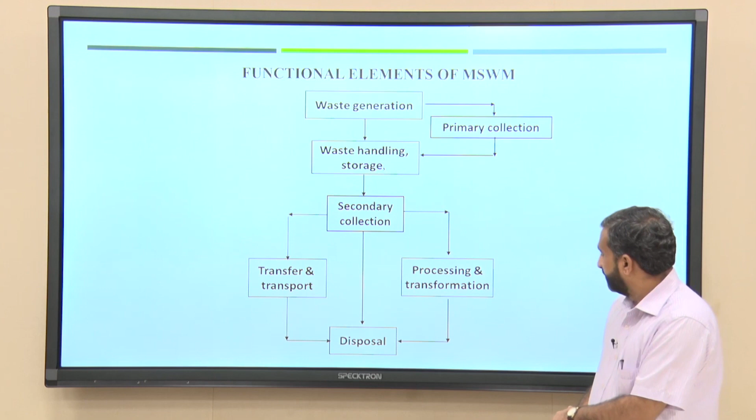Hello students, we are on module 8, chemical transformation. In the previous two lectures I talked about the major environmental issues from the incineration or combustion process. One was flue gas treatment, and the second is the solid residue produced after the incineration process.

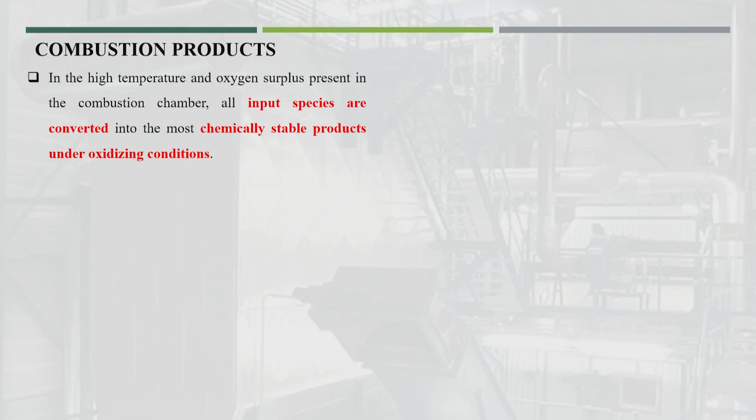Today we are going to talk about flue gas characteristics followed by treatment. First we will go for combustion products, what are the combustion products getting produced during the incineration process. At very high temperature, with huge amounts of oxygen or air for complete burnout of the dry waste, the entire material converts into chemically stable products under oxidation conditions, in the presence of air or oxygen.

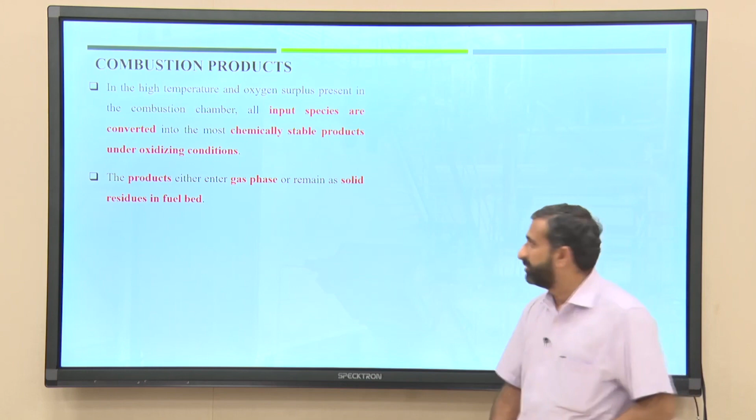These products either enter the gas phase, the maximum going into the gas phase, almost 80%, and the remaining will remain as solid residue in the fuel bed. So this is what I was talking about, two major issues: one, when the entire material converts into the gas phase, the other is the solid phase or solid residue.

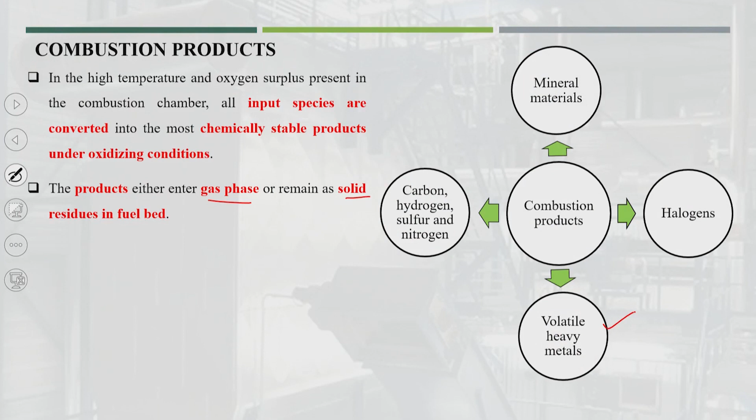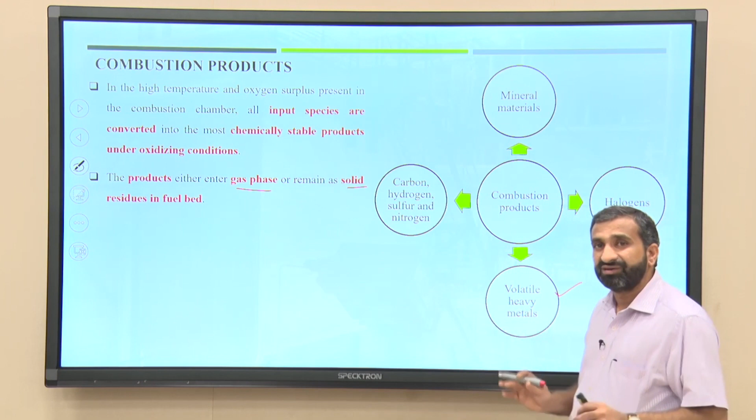There are different kinds of products coming out from the incineration or combustion process. The first is mineral material, another is carbon, hydrogen, sulfur, nitrogen, halogens, and volatile heavy metals. This is very important because normally metals won't get volatilized in the air, but since the incineration process temperature goes up to 1100 degree centigrade, some of the metals also get volatile and come into the flue gas.

Now, first is the mineral material. What could be the mineral material? There could be metals like iron, manganese, nickel and their compounds, and this mostly comes up in the bottom ash, that solid residue, or slag, at the end of the grate, as you saw in the previous lecture's line diagram. Trace products of incomplete combustion are also found in the bottom ash. So these mineral materials are normally found in the solid phase, and that is normally called bottom ash or slag.

Now the second one: carbon, hydrogen, sulfur and nitrogen. The stable oxidation product of carbon compounds converts into CO2 in the gas phase, hydrogen converts to H2O, also in the gas phase, sulfur is converted into SO2 and solid sulphate. Both products will be gaseous and also come up in solid form as solid sulphate. Nitrogen partially converts into NO, which is one of the most polluted gases.

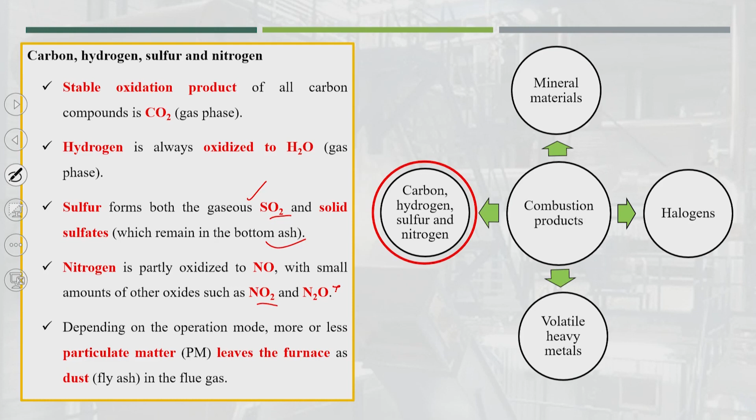This NO is oxidized into NO2 and N2O, which is also a very problematic gas. Depending on the operation mode, more or less particulate matter, PM, also leaves the furnace, and that is normally called fly ash, which also becomes part of the solid residue.

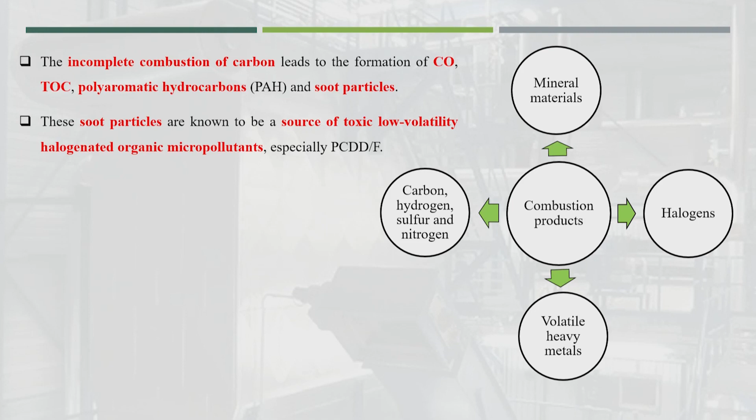Uncompleted combustion of carbon leads to the formation of CO, TOC and PAH, which are other problematic particles, and soot particles also get produced. These soot particles are known to be a source of toxic, low volatile, halogenated organic micropollutants, especially PCDD and PCDF, which we will discuss in detail, normally called dioxins and furans.

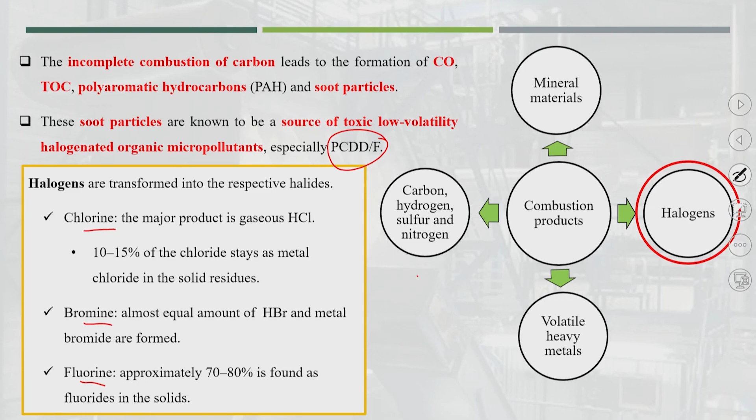Finally, the volatile heavy metals. Many metals evaporate as chlorides in the furnace, and more than 80% of the mercury and cadmium content in the waste leaves the combustion chamber in the flue gas. 30 to 50% of zinc, arsenic and lead is also evaporated in the combustion chamber and transferred to the raw gas, also coming into the flue gas.

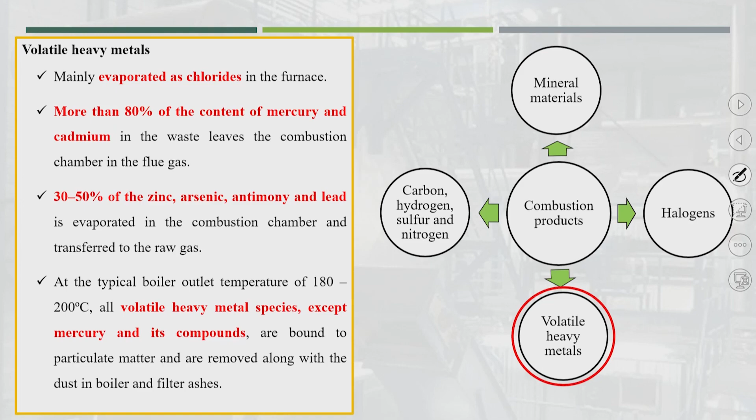Especially at the boiler outlet temperature of 180 to 200 degree centigrade, the volatile heavy metal species, except mercury and its compounds, are bound to particulate matter and are removed along with the dust in boiler and filter ashes. So these volatile metals also get produced, mostly coming into the flue gas, and need to be treated.

Now, the flue gas. This lecture we will mostly talk on flue gas characteristics, followed by their treatment. About 80% of waste is transferred into the flue gas during the waste incineration process, as I told.

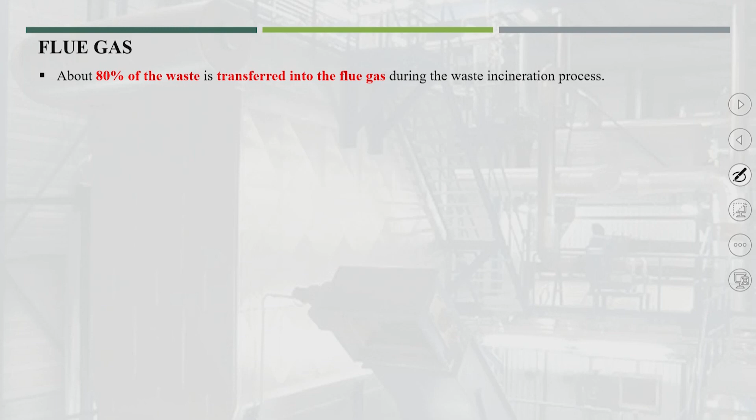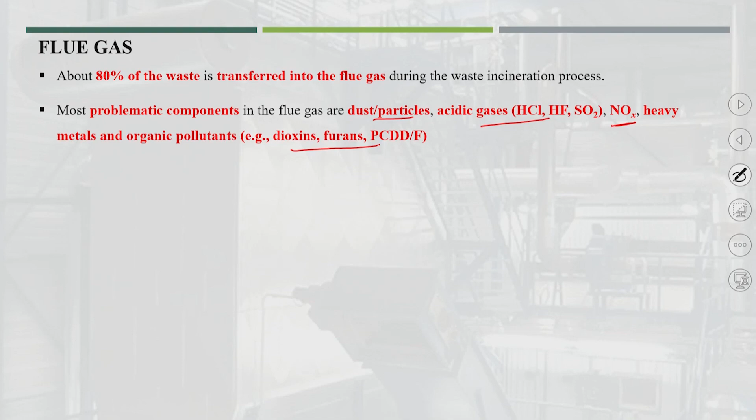And the problematic compounds in the flue gas, these are the major compounds in the flue gas. First is dust or particles, acidic gases like HCl, HF, SO2, NOx, nitrogen compounds, heavy metals, and organic compounds like dioxins and furans, which we call PCDD and F.

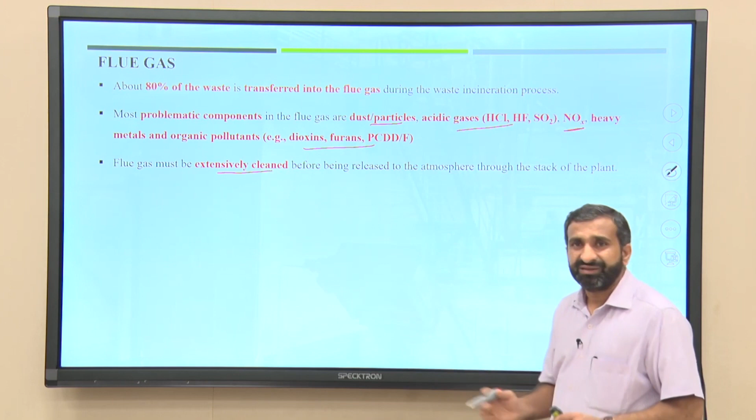So flue gas must be extensively cleaned before being released to the atmosphere through the stack of the plant. Sometimes it is also found in the literature that the cost of treatment of flue gas is more compared to the furnace or combustion process. So here you can understand that we need a very extensive cleaning facility for flue gas.

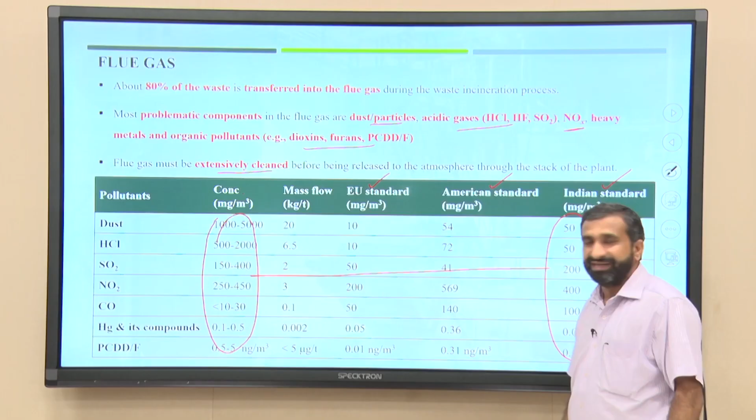But initially only the European Union came up with the standardization, followed by America, they came up with the standards of the flue gas. Now India also has come up with proper standards of treatment.

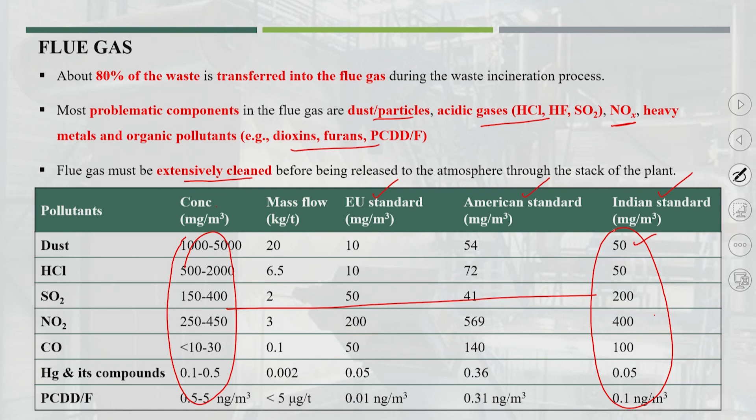Now we will talk about the flue gas cleaning system. Normally once flue gas is produced from the furnace, that will go to the flue gas cleaning system. This cleaning system is required to reduce the concentration of specific pollutants to well below the respective air emission limits, which we saw in the previous slide.

And there are 4 major pollutants. First, which we are going to talk about in this lecture, is dust or particles, acid gas - that is HCl or HF gases coming out in the flue gas, dioxins and furans, and finally nitrogen compounds.

But before that, in this line diagram, one very important unit of this entire flue gas cleaning system is the ID fan. We will first discuss this in one slide, then we will go pollutant by pollutant for treatment. These ID fans are called induced draught fans.

See, the draught fan - in the previous slide it was put at the last position. Now see, whatever gas is produced from the furnace, how that gas will go to the treatment system, or how we can maintain the velocity required through the cleaning system, and again that gas has to go to the stack - this management is entirely done by the ID fans.

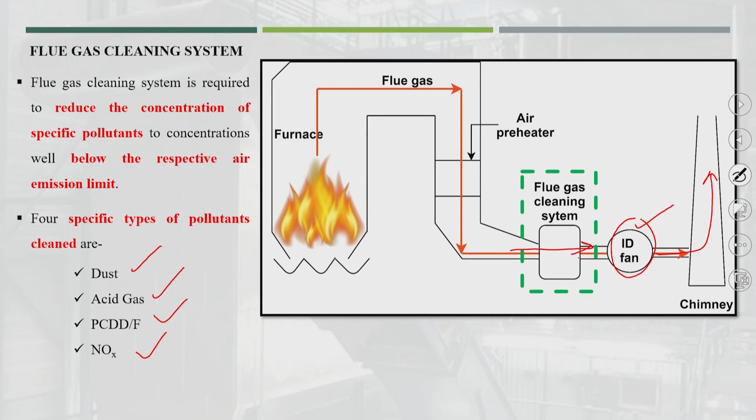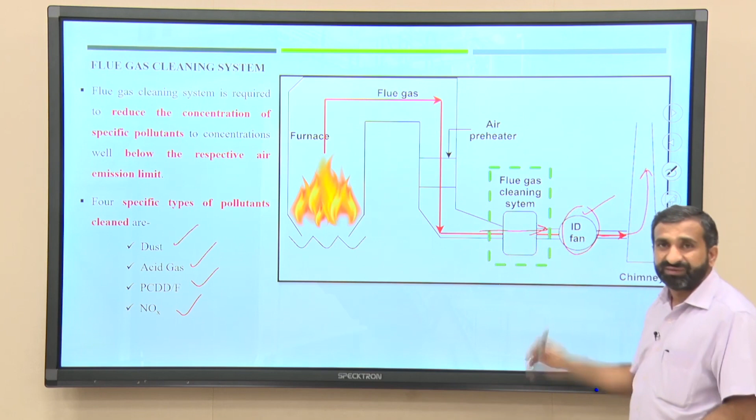So the ID fan is at the end of this treatment system, so that whatever flue gas is produced from the furnace will go through the flue gas treatment systems or facilities. This is the key component in the flue gas treatment system.

You see here, this is one of the diagrams of the ID fan. This ensures the transport of the flue gas from the furnace through all the process steps of the flue gas treatment plant to the stack. This is specially what ensures the transport of flue gases.

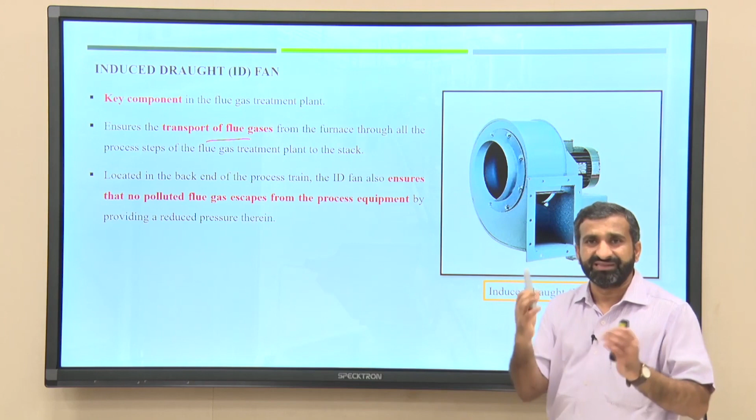Located at the back end of the process train, the ID fan also ensures that no polluted flue gas escapes from the process equipment. This is one very important point. It is possible because the temperature of this flue gas in the initial phase goes to 700 to 800 degree centigrade, and it is possible that it will escape from that particular line. So this ID fan is located at the end of the entire process, so that this flue gas should not escape from the process equipment.

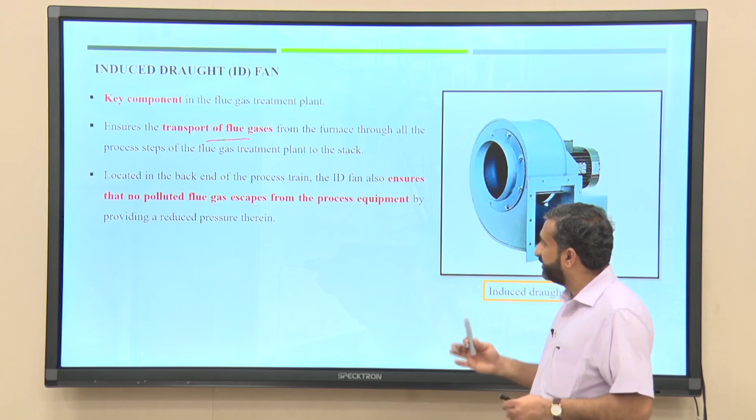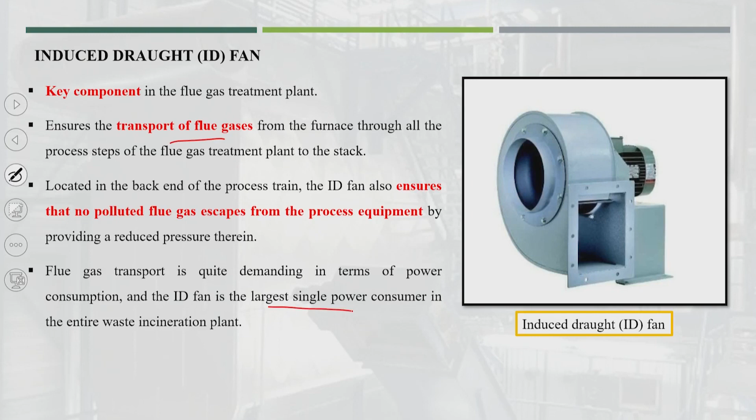Flue gas transport is quite demanding in terms of power consumption, and the ID fan is the largest single power consumer in the entire waste incineration plant. This is what I was talking about - the cost of treatment itself is sometimes very high compared to the installation of the entire incineration plant. Why? Because the cost of these fans is also sometimes very high, with high power consumption. So power consumption means the maintenance cost is also very high for the incineration plant.

Now, one by one we'll go through the pollutants. The first pollutant is the dust. So how is dust removed? There are different kinds of treatment facilities available for dust removal.

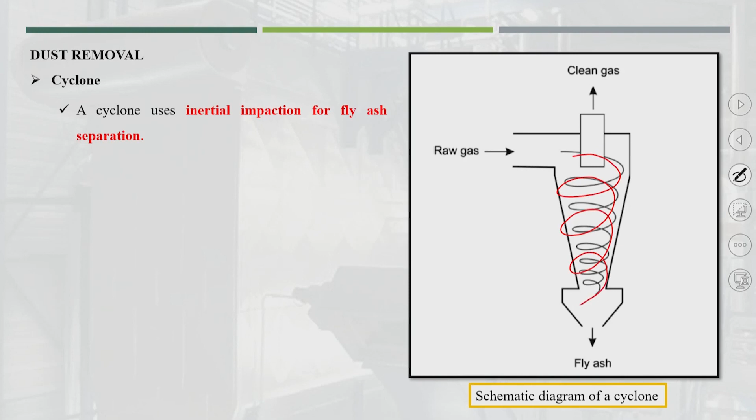The first is the cyclone. The cyclone uses inertial impaction for fly ash separation, like you see here - this is a line diagram of the cyclone. The flue gas passes through this vertical unit. The gas enters the cylindrical chamber tangentially at high velocity, forcing it into a cylindrical path. Very high velocity enters the cylinder, and the centrifugal force acting on the particles causes them to collide with the wall, where they impinge and settle down into a discharge hopper. Whatever particle gets impinged onto the wall is finally deposited into the discharge hopper.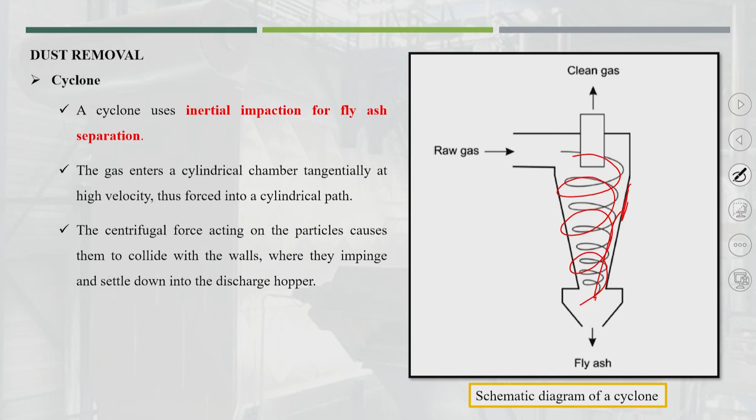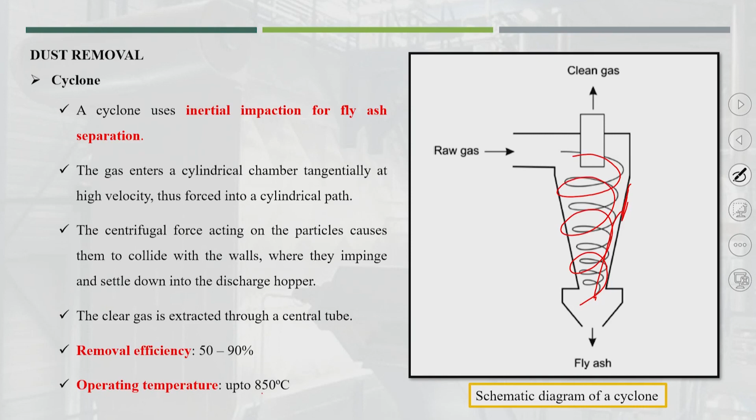The clear gas is extracted through a central tube. Removal efficiency is 50 to 90%, and this treatment unit can operate at temperatures up to 850 degree centigrade - that's one of the major benefits of this system. Whatever gas is produced from the furnace, the temperature can go up to 800 degree centigrade, so that gas can go directly to the cyclone.

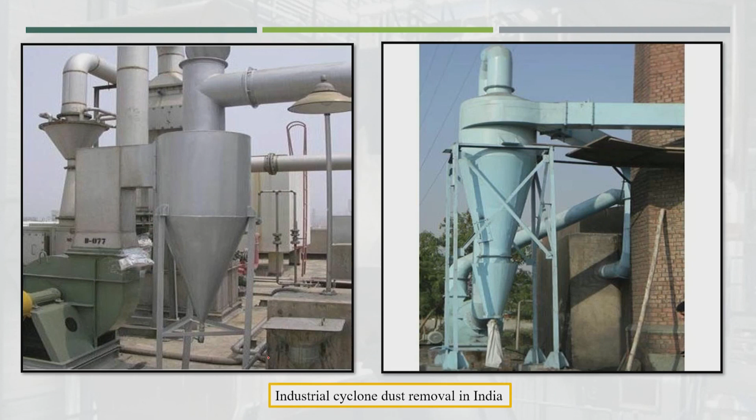This is an industrial cyclone, you see here, similarly designed. This is an industrial cyclone dust removal unit in India.

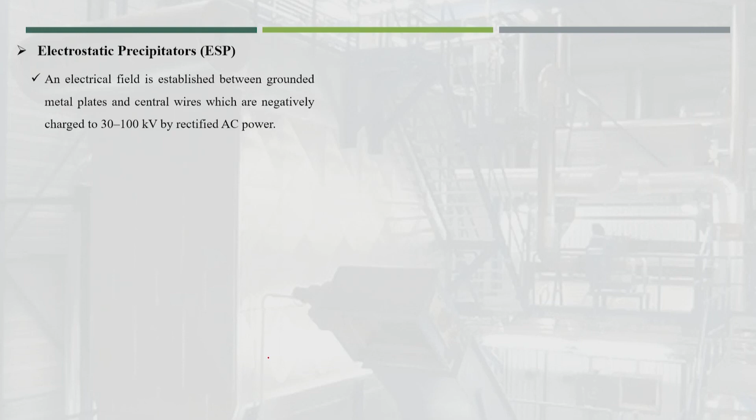Now, the next unit is the electrostatic precipitator. This is one of the oldest treatment units for removal of dust or particles. Small, fine particles can also be easily removed by the electrostatic precipitator. In the ESP, the electrical field is established between grounded metal plates and a central wire, which is negatively charged by rectified AC power. There will be two metal plates, and inside there will be wires - high voltage wires for corona discharge.

That wire will have negative charge, and the flue gas passes through the aisles between the plates at low velocity, 0.5 to 1.5 meters per second. This is the raw gas flowing between the two plates and the central wire. The fly ash particles are ionized by the corona discharge and start to migrate along the lines of the electrical field until they impinge upon the plate.

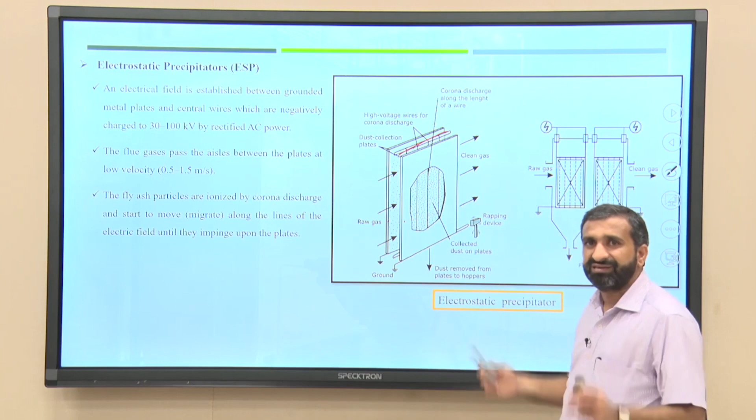Mostly these particles are positively charged, and the corona wires have negative charges, so the particles directly impinge onto the plate. Finally, the plates get cleaned and the particles or solids are collected into the discharge chamber. At certain times, the deposited particles are removed from the plate by rapping or mechanical vibration and collected into the discharge hopper.

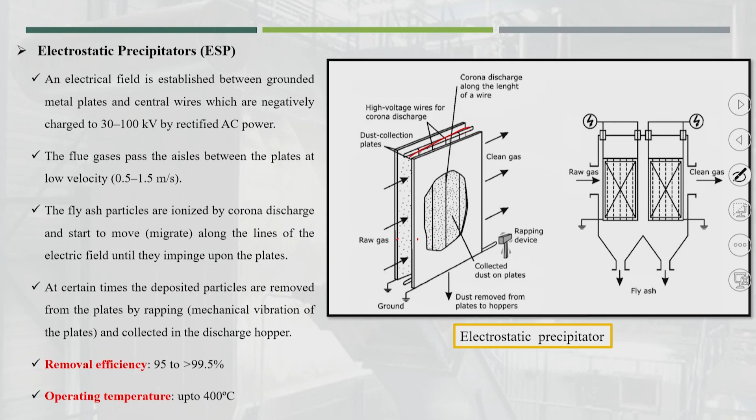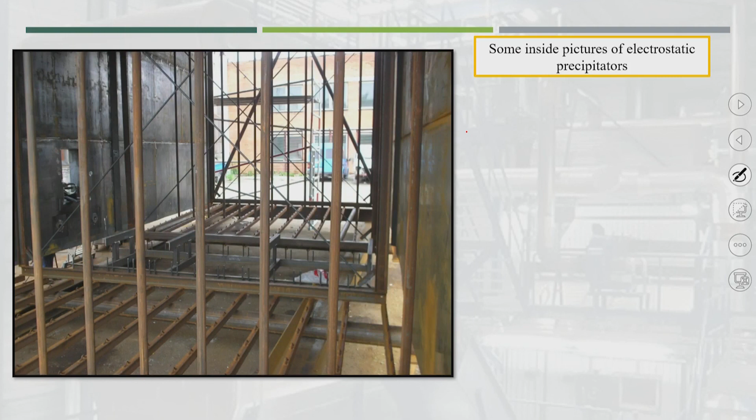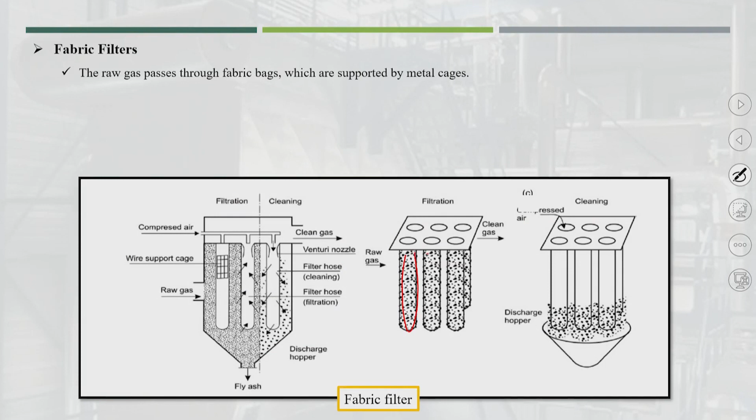Now, the fabric filter is another treatment technology available to remove particles or dust. The raw gas passes through fabric bags, which are supported by a metal cage - these are the fabric bags. Gas flows commonly from the outside to the inside, and finally the clean gas comes out.

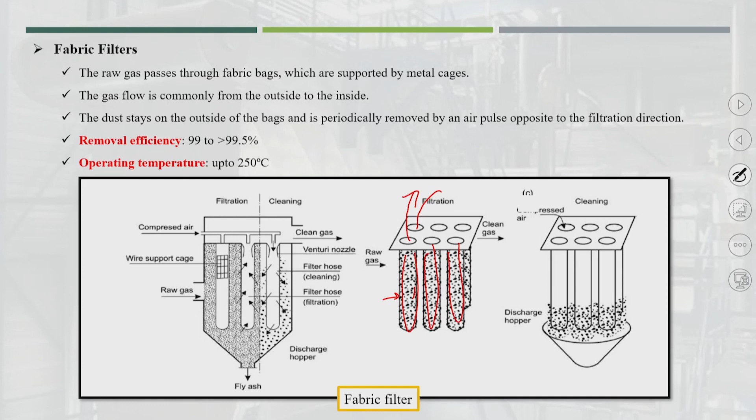The dust stays on the outside of the bag and is periodically removed by air pulses opposite to the filtration direction - so from time to time the settled solids get removed. Removal efficiency is also very good, about 99 to 99.5%. The problem is that the operating temperature should not exceed 250 degree centigrade, because these are cloth or fabric bags, so we can't put higher temperature gas into them.

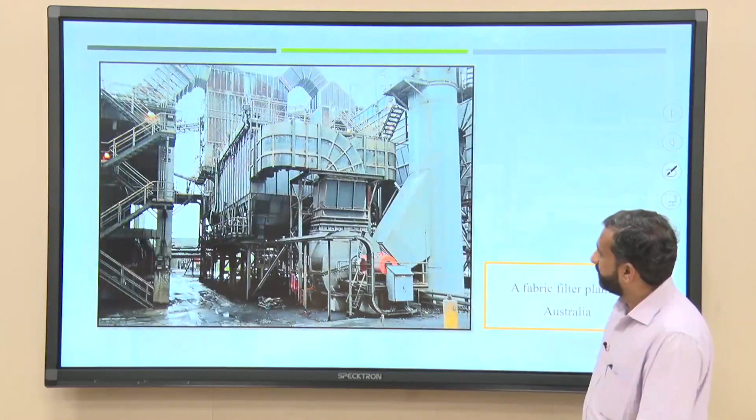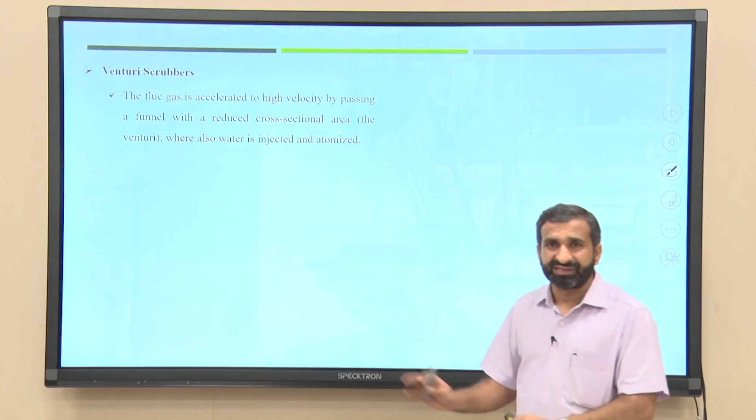This is a fabric bag plant in Australia. Now the last unit is the Venturi scrubber. This is well-known technology, normally available at incineration plants, especially for medical waste incineration. This technology is available in India too - wherever medical waste incineration plants exist, you can see this technology very easily.

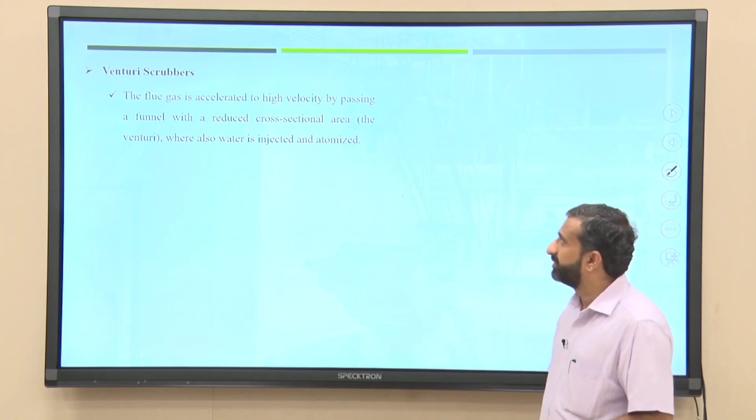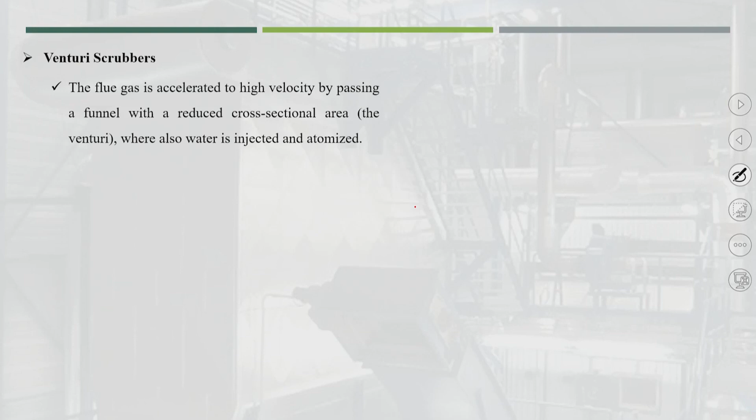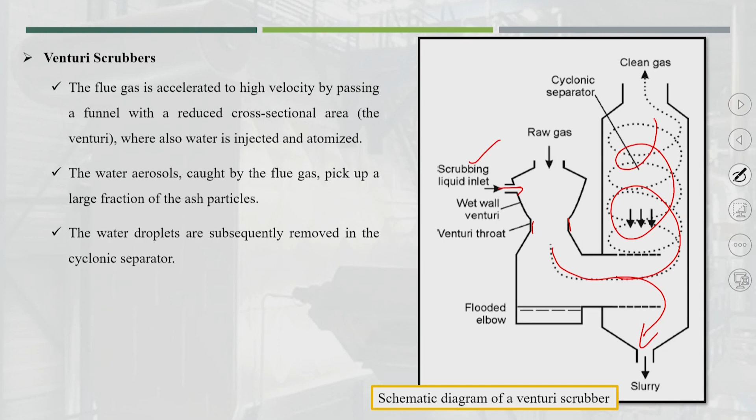Raw gas is entering, and here the scrubbing liquid water is getting deposited onto the raw gases. Because of that, the particles mix with the water and come out in slurry form, while the remaining clean gas comes out. A venturi throat is followed by one cyclone, and from the cyclone clean gas comes out. The water aerosol caught by the flue gas picks up a large fraction of the ash particles, and the water droplets are subsequently removed in the cyclonic separator.

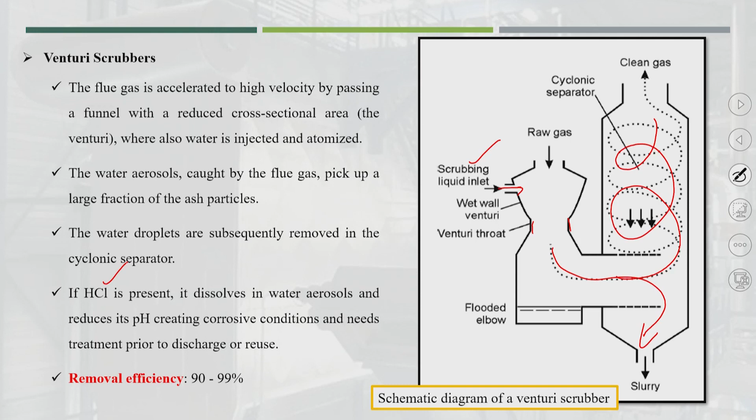If HCl or other acid gases are present, they dissolve in the water aerosols and reduce its pH, creating corrosive conditions that need treatment prior to discharge or reuse. Here removal efficiency is 90 to 99%, and we can also operate at temperatures around 400-500 degrees using this venturi scrubber.

This is one unit of the venturi scrubber.

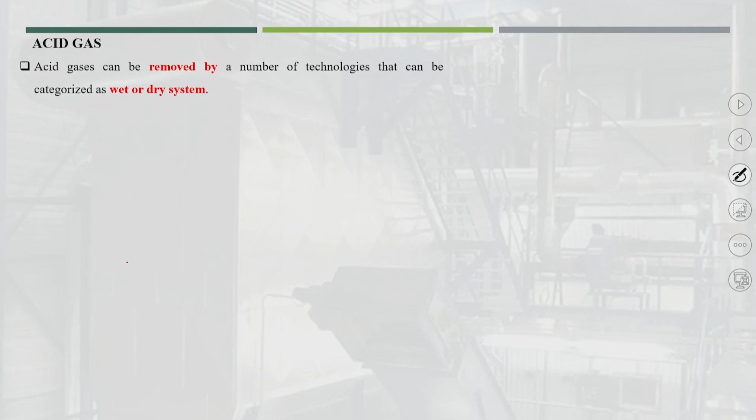Now, the next pollutant is acid gas. Acid gas can be removed by a number of technologies categorized as wet or dry systems. First we will go for the wet system. Wet scrubbing is normally applied after the fly ash has been removed, typically in an ESP. So once the fly ash is removed, we can go for the wet scrubbing facility.

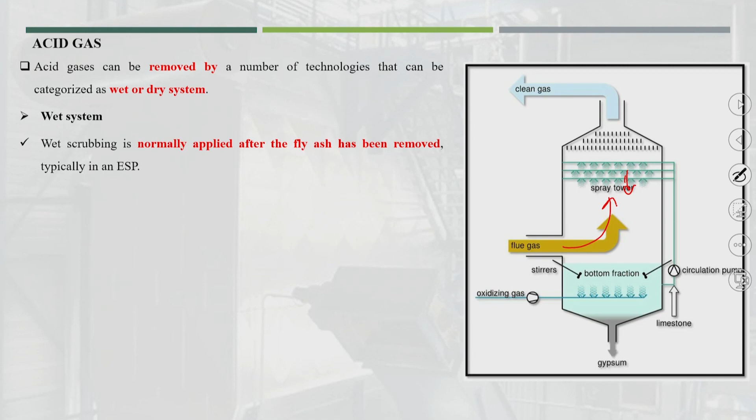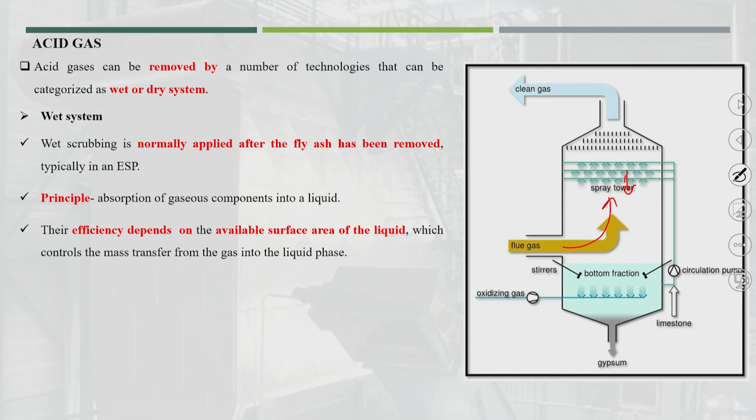Here water is getting sprayed, and the flue gas enters from below into the cylinder, and finally clean gas comes out. The principle is absorption of gaseous components into a liquid. The efficiency depends on the available surface area of the liquid, which controls the mass transfer from the gas into the liquid phase.

It has a two stage installation with an initial acidic scrubber to remove HCl and HF, followed by a slightly acidic or neutral alkaline scrubber to remove SO2. Both acid gases could be removed this way: first the acidic scrubber, followed by the alkaline scrubber.

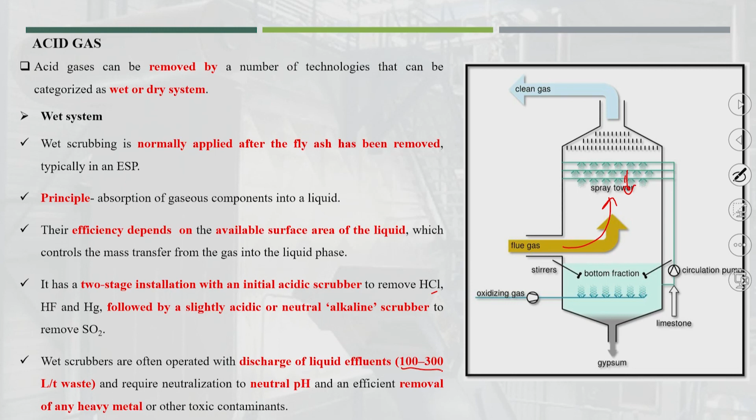But the problem is this wet scrubber is often operated with discharge of liquid effluents. A lot of slurry is produced, and this liquid effluent amounts to 100 to 300 liters per ton of waste combusted or incinerated, requiring neutralization to neutral pH and efficient removal of heavy metals or other toxic contaminants. So if you are planning a wet scrubbing treatment facility, you also require a wastewater treatment facility to treat that liquid effluent.

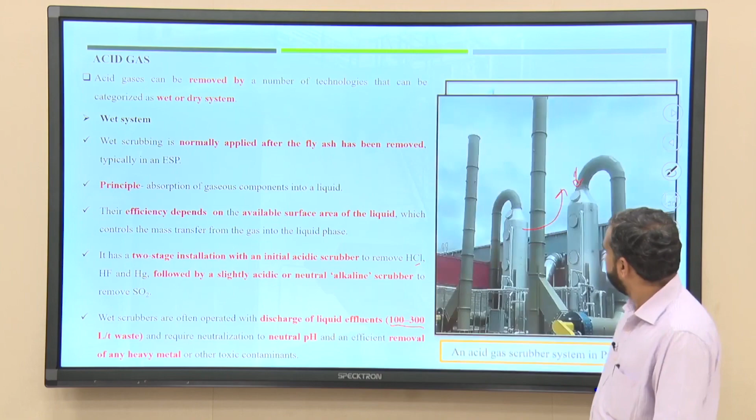This is one of the scrubbers - a packed bed wet scrubber.

Now for the dry system, normally we inject two chemical compounds like calcium hydroxide and sodium bicarbonate (NaHCO3) into the flue gas for neutralization of acidic gas compounds. In the dry process, the agent is injected as dry powder, maybe together with water, while in the semi-dry system the agent is injected as a slurry that dries in the flue gas.

So how does this dry system remove HCl? If you are adding calcium hydroxide, it will produce calcium chloride plus H2O. So finally this HCl, the acid gas in the flue gas, is treated by adding a few chemical compounds.

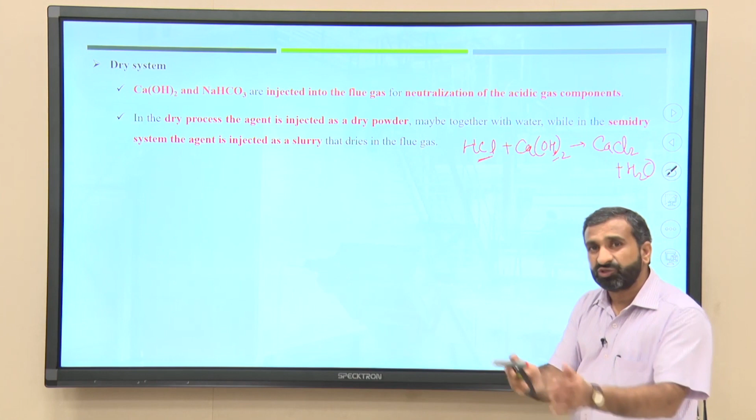So the dry system is sometimes mixed with the venturi scrubber. We saw that in the venturi scrubber, water is injected into the throat. So if you mix these chemical compounds along with the water, not only will the dust get removed, but also the acids available in the gases will get removed under the venturi scrubber system itself.

Now, dioxins and furans are normally called PCDD and F - polychlorinated dibenzo-p-dioxin and dibenzofurans. They are already present in the MSW, but they are almost totally destroyed in the combustion chamber. At temperatures reaching 800, 850, or 1000 degrees, all dioxins and furans get destroyed completely. But when the flue gas temperature is lowered, new formation of dioxins and furans becomes possible.

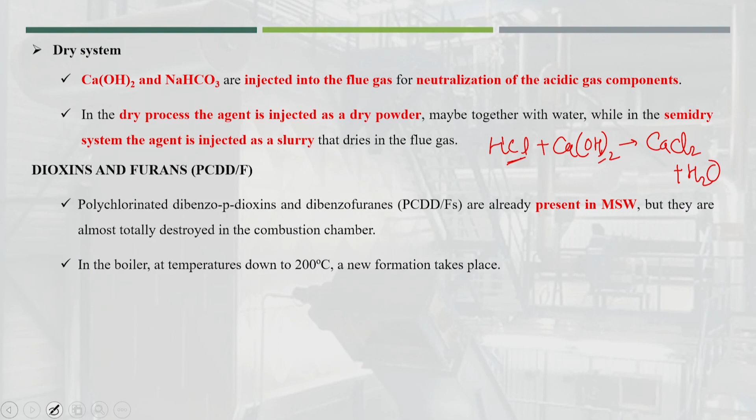So in the boiler, when the temperature goes down to around 200 degrees centigrade, new formation takes place - meaning normally below 400 degrees centigrade, these dioxins and furans get produced again in the flue gas.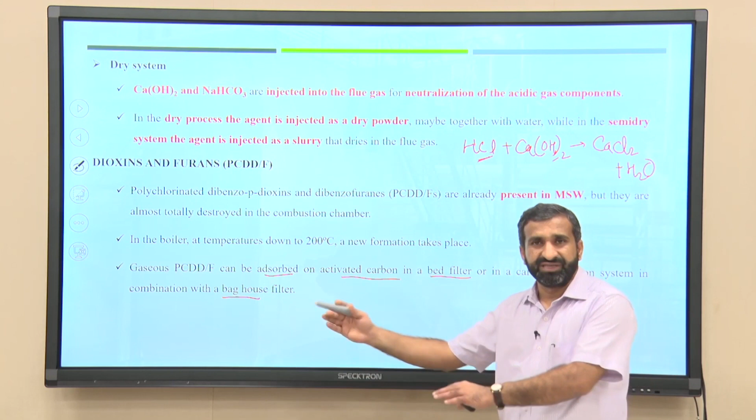The gaseous dioxins and furans can be adsorbed onto activated carbon. This is the only technology currently available for dioxin removal - activated carbon bed filter, or a carbon injection system in combination with a baghouse or fabric filter. This way the dioxins can be adsorbed onto the carbon bed filter, through a simple adsorption process followed by fabric filter treatment, removing or treating the flue gas for dioxins.

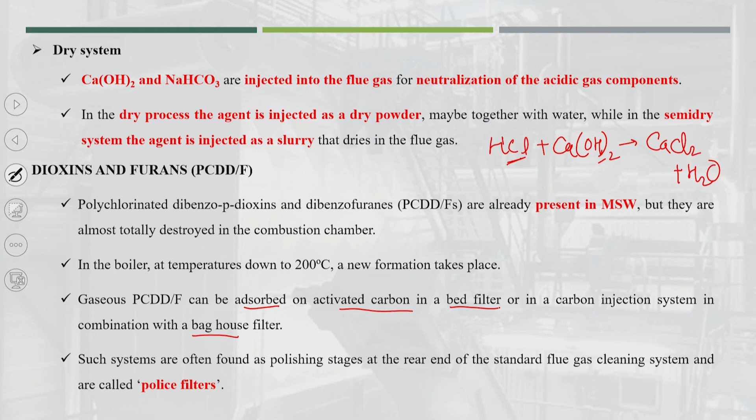Such treatment systems are often found in the polishing stage at the rear end of the standard flue gas cleaning system, and are normally called a police filter. These units are the last unit of the entire flue gas treatment system.

Now, the NOx nitrogen compounds. NOx is a common term for nitrogen oxide and nitrogen dioxide, which can be in two forms. In waste incineration, typically more than 95% of total NOx in the flue gas is present as NO, which is the problematic one.

If the combustion temperature drops below 850 degree centigrade, an increasing fraction of NOx is present as N2O, and the problem with N2O is its extremely high greenhouse gas potential. If you compare with CO2 which is 1, N2O has a greenhouse gas potential of 310.

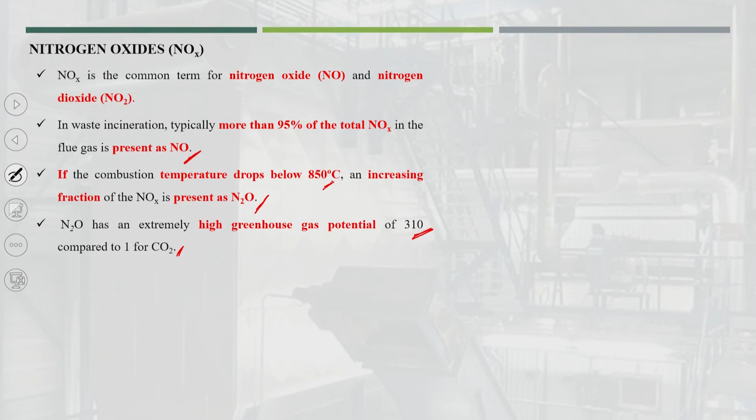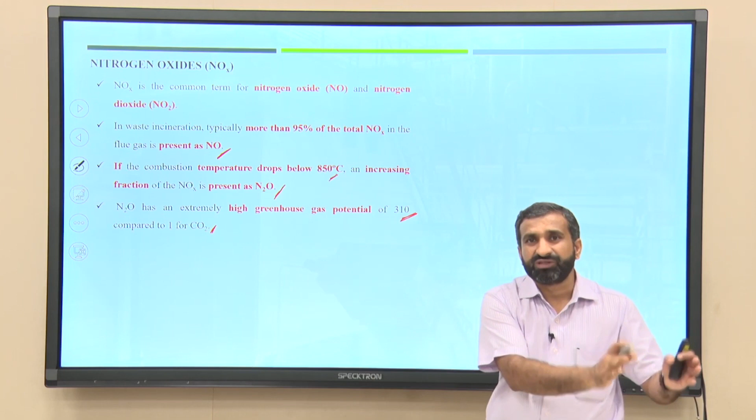If the temperature drops below 850 degree centigrade, much of the nitrogen gets converted into N2O. This is the idea behind standardizing the temperature. So in the European Union and Indian standards, the first furnace temperature should be more than 850 degree centigrade, just because of nitrogen compounds.

There are two kinds of removal treatment facilities available: one is selective non-catalytic reduction (SNCR), and the other is selective catalytic reduction (SCR). Selective non-catalytic reduction involves injecting ammonia NH3 or NH2 containing compounds into the secondary combustion chamber of the furnace for reduction of NOx to N2.

This is a very easy process; the non-catalytic reduction method is put into the secondary combustion chamber, where these combustion gases get combusted again. Minor quantities of N2O are also formed in non-catalytic reduction, and since the maximum percentage is NO, once it is treated with the NH2 containing compound, it converts into N2 gas.

Or suppose you use a non-catalytic compound like ammonia; that is also a very easy process to convert nitrogen compounds into N2 gas.

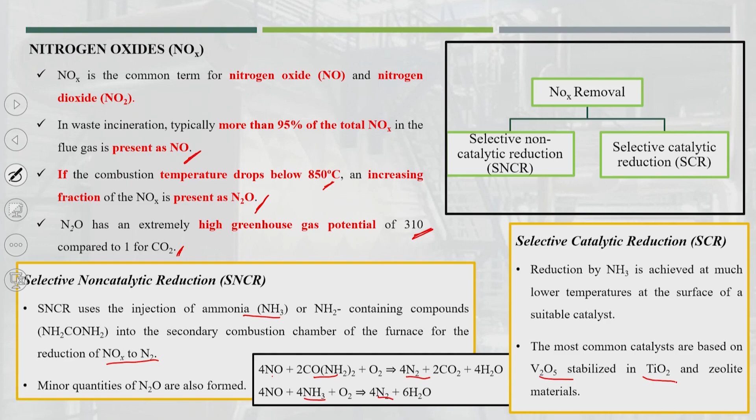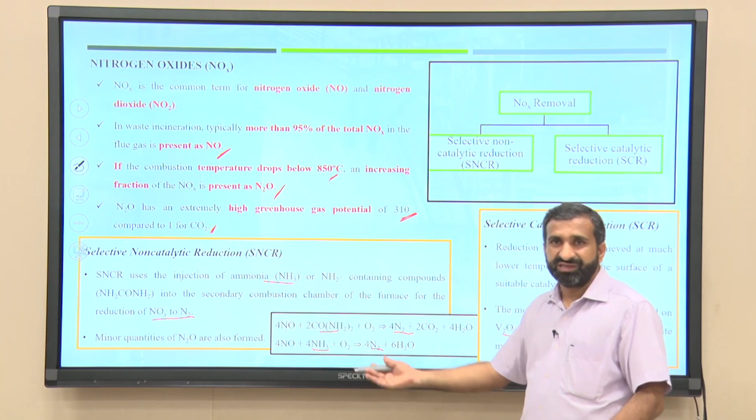For selective catalytic reduction, the most common catalyst is V2O5 stabilized in TiO2. This is a very costly process. So in most cases we find that the non-catalytic reduction process is the one used for treatment of flue gas nitrogen compounds.

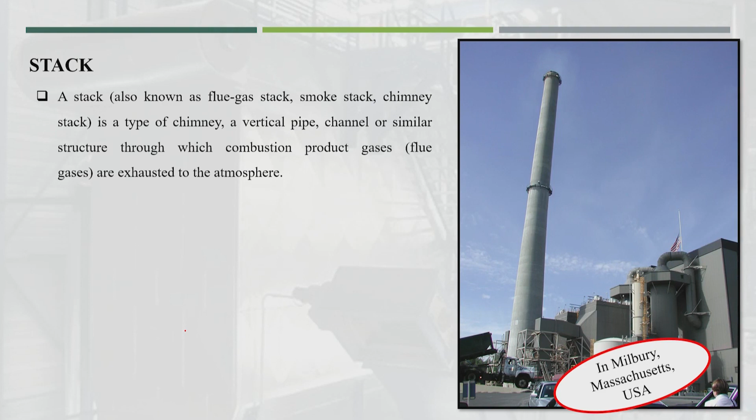As per our Indian Municipal Solid Waste Management Manual, the minimum stack height should be 30 meters above the ground. This is a very important standard. Even though we treat flue gas for different pollutants, some concentrations of pollutants will always remain, so it's good to have a greater stack height so that local residential people do not face any issue.

The stack should be attached with necessary monitoring facilities, required for monitoring general parameters as notified under the Environment (Protection) Act, which already gives emission standards. Sampling is done at the stack, and the pollution control board, whether state or central, collects samples from the stack to be analyzed in the laboratory.

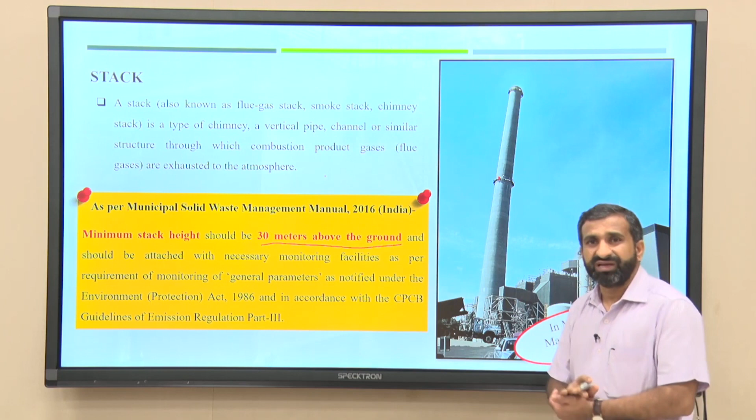Now many state pollution control boards have online monitoring systems installed at the stack, so by sitting in the office itself, they can know the characteristics of the flue gas being dispersed into the atmosphere after flue gas treatment facilities. So here we finish the flue gas treatment facility.

Now, another important environmental issue is solid residues. We don't have much literature on solid residues, but I'll show a few slides, since some standards are given for what kind of ash should be produced and how it has to be treated to meet those standards. Some treatments are available, but that treatment is very difficult. We will see this in the next lecture. Thank you for today's lecture.